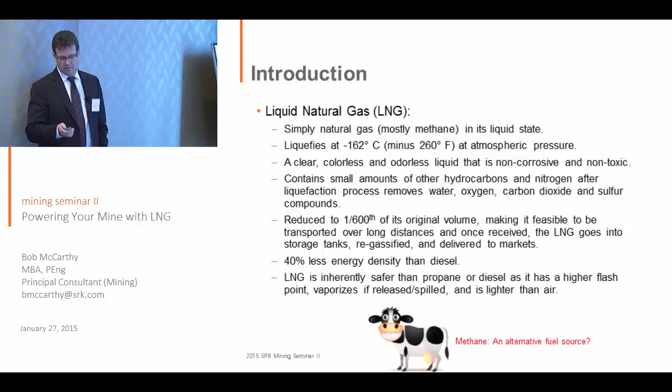It's been around in Canada for a long time as a heating source. Most every home in urban Canada anyway is heated by natural gas. But Canada is only a very small portion of the global LNG market.

And why the interest? Well, Canada itself has appreciable natural gas reserves, of course, and it is a replacement for diesel in many applications. The environmental benefits of reduced greenhouse gases are very real, as are the substantial cost savings.

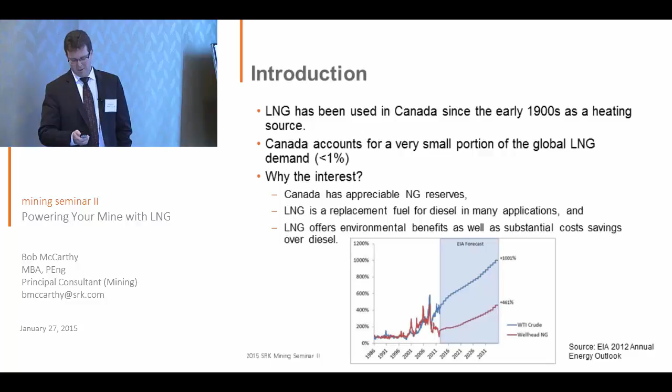So you can get natural gas through what we call conventional sources, from oil and gas fields, but there's also unconventional sources, like shallow biogenic gas, which is created by anaerobic bacteria.

But you've also got coal bed methane, so the gas is locked up in the structure of the coal itself, or it can be in the surrounding rock, and it comes out in much higher concentrations than you would perhaps think.

Tight gas is, as the name implies, in a very low permeability rock, typically sandstones or limestones. Shale gas, well, that's the one we're hearing a lot about these days—that's gas in shale, obviously. Again, low permeability, but it's the one that's recoverable, not easily, but through fracking.

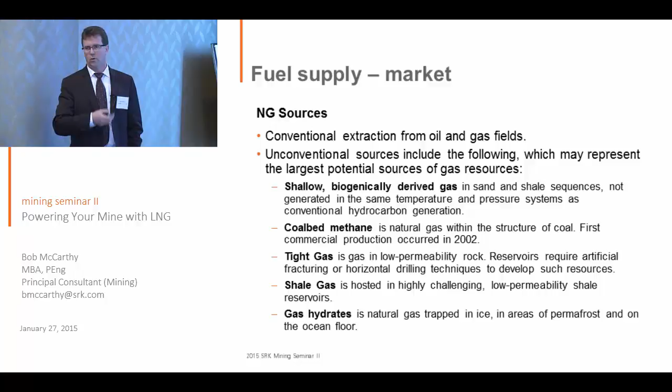And gas hydrates is kind of a new kid on the block, but quite possibly has the greatest reserve in the world. Some people speculate that what's in gas hydrates, which is an ice-like lattice crystalline structure that traps the methane inside of it, the resources in that could outnumber all of the resources in oil and gas, conventional and non-conventional combined.

So what about getting this stuff to market though? We have it all in the ground, but we don't really have the infrastructure at the moment to get it to market.

At the moment, there's no Canadian export LNG projects in operation. Of course, Christy Clark would like to have us go down that road, and there's a lot of stuff in the media these days about maybe how that's not working out so well for Christy these days, but it certainly is something that everybody's got their eye on, and it's not just for export markets.

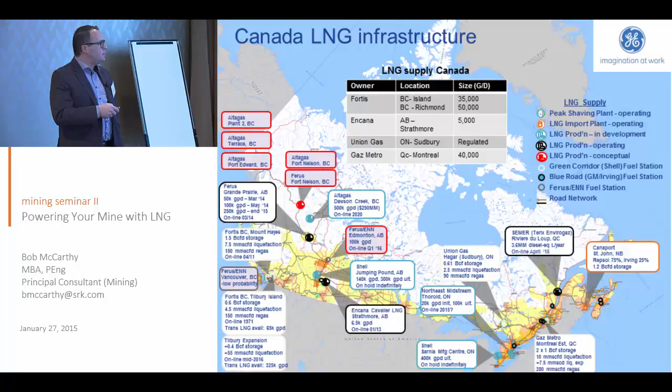And there's the Canaport and other existing infrastructure in central Canada. What we see here is a lot of planned projects, and there's a couple worth mentioning. Shell Jumping Pound, this one is on hold. Shell had made the purchases for all of the capital equipment, but have shelved the plans around that.

This is just a highlight. Really the economic model here is a little bit different these days. We're looking here at around $1, maybe a bit more, a liter for diesel. This has softened. Still don't have a really good explanation as to why the drop in price that you see as a consumer at the gas pump in gasoline has come down quite a bit, and the diesel relationship hasn't quite been as linear. So diesel right now, talking to a few folks over the last couple of weeks, it depends on where you are in the world, the volumes you're buying in, and the duration of the contract, but we're seeing about a 10 to 17% slip from the $25 a GJ price.

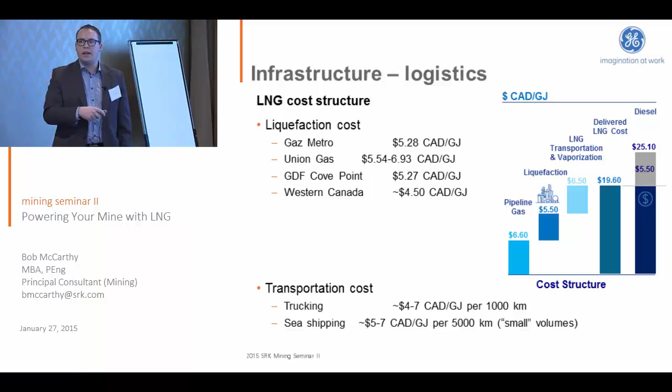Around the LNG, this number is actually pretty good for the North America domestic market. I've seen numbers as low as $17 a GJ delivered. And really when we're looking at that delivered price, what goes into it is the pipeline gas and any of that sort of tolling, the liquefaction, the physical cooling and condensing of the gas, and then the shipping and vaporization on site. The numbers here are sort of where we attribute this to. And again, it's the various gas suppliers, depending on whether they're sort of primary supplies coming from a regulated or unregulated environment, that plays with some of the numbers.

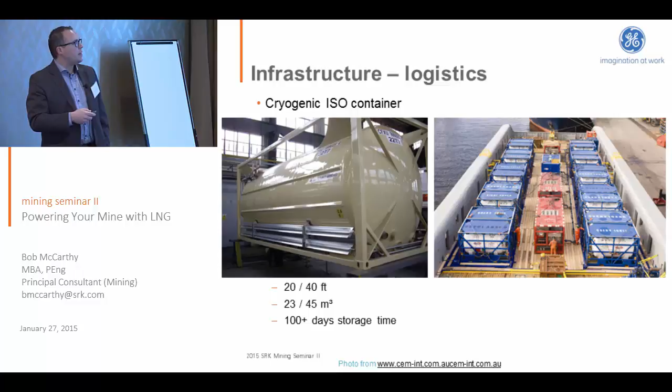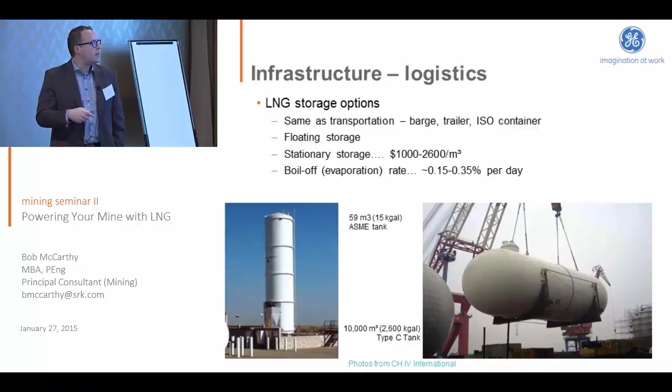Storage, this would be what you'd see for storage. A lot of the remote mines we talk to, LNG can be delivered to GPS coordinates now over the road via virtual pipeline, just trucks taking it in. The mines will take a delivery every day or every other day, and then they'll have these tanks on site to house the LNG. And that's what we've been looking at here.

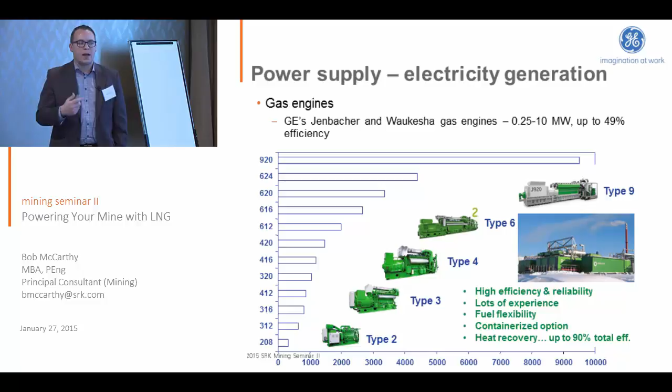GE has, this is just a slide from our group, there are other companies as well, where we have these gas engines. The recent project in the news was in Whitehorse with Yukon Energy. So Yukon Energy Corp had purchased two of our J624 engines, rated just under 9 megawatts on natural gas production in Whitehorse. And that gas for them, for that supply, will be coming up through Delta over the road for now.

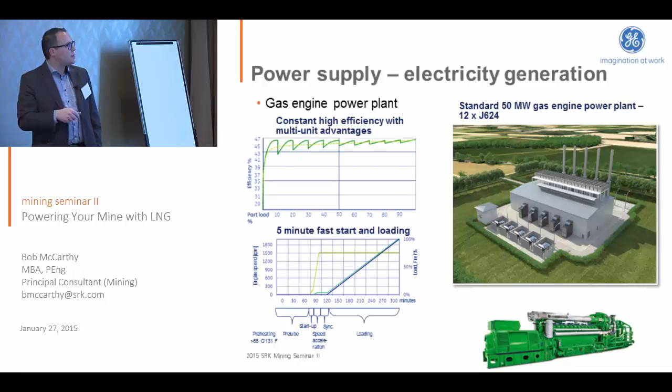And that's it for me.

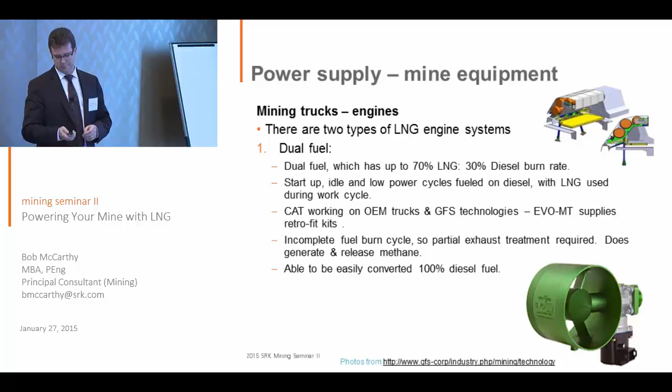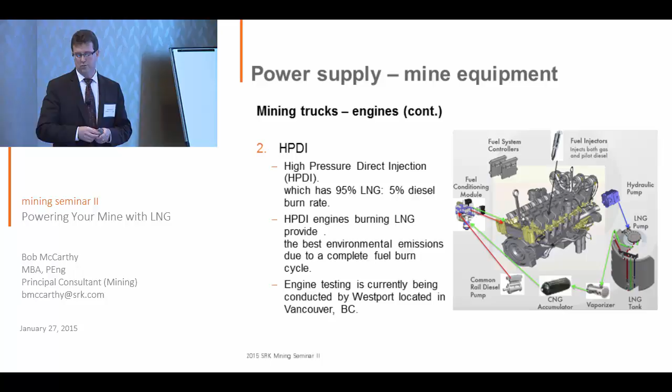This is the other one, HPDI. You can have 95% replacement by LNG of the diesel. They have the best environmental aspects - they don't release, they have a full fuel burn, so they don't release excess methane. Right here in Vancouver, Westport is sort of a leader in this space, and they have actually engaged with Caterpillar to develop some haul truck technology, haul truck engines.

The LNG is capable of doing the same work as diesel, same horsepower. It's not quite, when you put the pedal to the metal, it's not quite as responsive, but that's something you can work into your productivity determinations. It's the overall cost reduction that's really driving this.

You may require additional additives to the engine oil to replace some of the things that you might get out of diesel for lubricants, etc. Because it's cleaner burning and doesn't gunk up and all those sorts of things, your maintenance costs are expected to be lower.

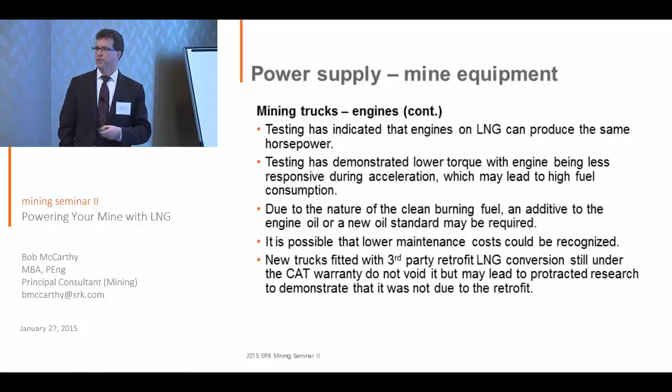We have heard from Caterpillar directly that if there's a problem with an LNG truck, a retrofitted LNG truck doesn't automatically void your warranties, but bear in mind that there will be investigations just to make sure it wasn't a cause of any particular problem.

Fuel storage is kind of the limiting factor right now with LNG on trucks, because you need that 2-to-1 volume of LNG to diesel. You need more storage, or you have to fuel twice as often for the same size storage. They're trying to target 12 hours of duration between refueling at the moment.

Similar to on the trucks, any of the fueling stations would require more tankage, and this is not just standard tankage, it's cryogenic, it's got special requirements, a little more expensive. There are no standards at the moment for any of this, so there's some fear that if they get into this now and then standards are developed, they would be non-compliant with standards, so that perhaps is a small risk at the moment.

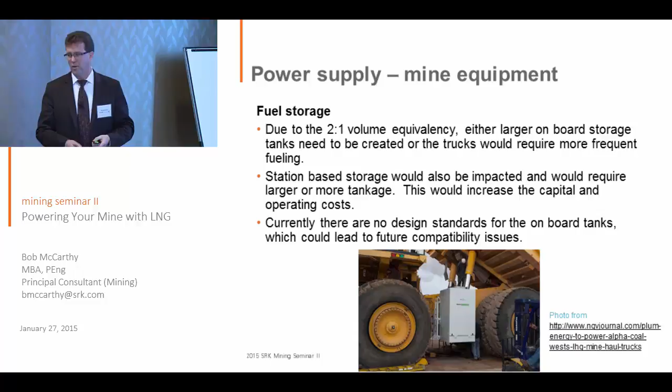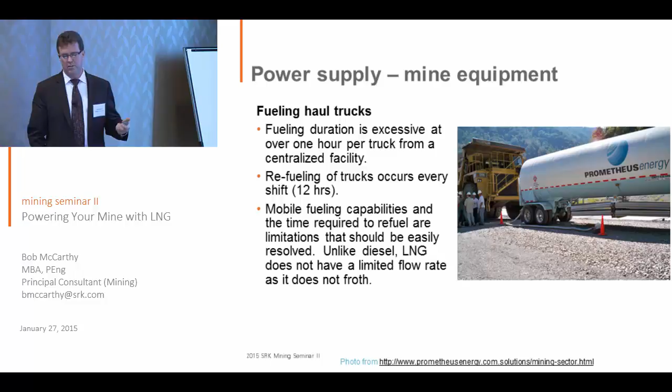There's no such thing with LNG. But you're going to have to develop new ways of getting it to a mobile location, just in case you don't want the truck to always travel to this highly specialized place. This is not a real setup, this is not how they would typically fuel a truck out on a remote site, but it does depict that there would be some challenges in trying to work that out.

So what's happening out there in the mining world? I've mentioned Caterpillar a couple of times. They have achieved some pretty high diesel replacement with LNG - this would be in the HPDI type technology. They are running a couple of test trucks out there, one in Arizona, and they've apparently struck a deal with one of the oil sands companies to test a truck up there. I'm not sure if that's underway yet, though.

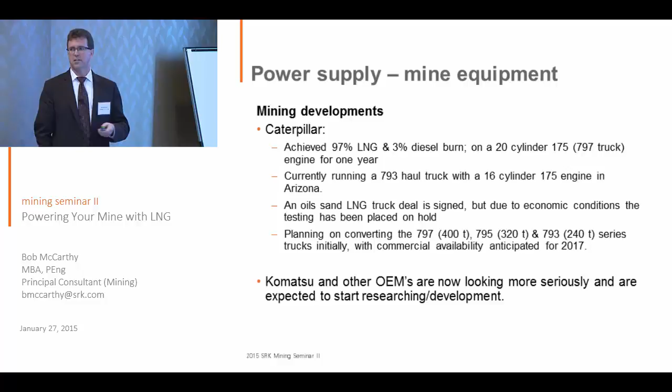So their focus at the moment is the larger trucks, and whether they're still on track or not, we haven't talked to them in a few months. They were looking for commercial production in 2017. But not everyone's as advanced as Caterpillar, yet they're going to be close behind, because if this is seen as the next big thing, everyone's going to be part of it.

There's one company out there doing great things in testing this. Alpha Coal West in the Powder River Basin is now converting pretty much their whole fleet at one mine to LNG after a successful pilot.

We understand there's also a large mine in South America, Chile I think, that is looking at this technology, and again, on-board tank storage is one of their main issues.

I'm not sure of their current development, but a local miner in BC was working with Fortis to bring LNG in on a trial basis at their mine. I think they're weighing their options—they might look at CNG, compressed natural gas. But there seems to be some incentive to work with Fortis at this moment. Don't know how long that'll last, but to get a project in partnership with them, there are big incentives.

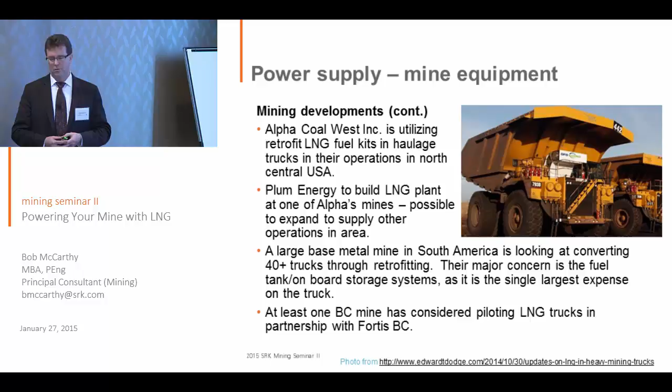So, what's one of the main drivers, as I mentioned at the outset, is this price differential with diesel. We've run the numbers to see what that actually means. Unfortunately, with what's happening with diesel, it's a bit of a moving target. But based on 50% replacement in haulage trucks, we determined at the prices we had for that study it was about a 30% savings in haulage costs.

So if haulage cost is half of your mining costs, that becomes a significant impact on the overall cost of the operation. It is, however, offset by extra costs on the trucks. Right now retrofit kits are around $200,000 to $250,000 per truck, plus additional storage cost for tankage and fueling stations. We factor in about an extra $2 to $3 million for that. That aside, you still get the 30% savings.

The 20% there is just factoring in, what if you took into consideration something closer to today's price? So it does knock it back a bit, but how long is today's price going to last? It's anybody's guess.

Then we got from John some numbers on power generation. For a small plant, 10 megawatts, 90% duty factor, 43% plant efficiency, and respective prices for LNG and diesel, the savings is about $3.4 million—I assume that's per year, John? Substantial money, but again you have to look at the higher CapEx costs, including increased costs for storage. But the savings are so compelling that the upfront CapEx is quite minor in the scheme of things.